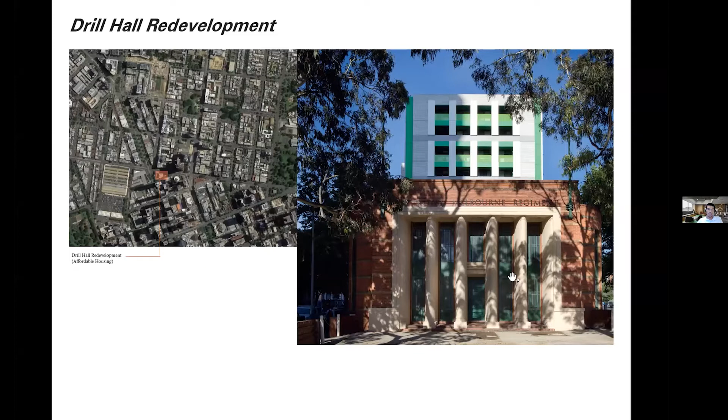This is a shot of the restored heritage hall, which is normally used by the people of Melbourne. Last time there was an event by the Malaysian group here for Hari Raya, which was quite nice.

This is the McIntyre Drive social housing, located in the coastal town of Altona, west of Melbourne. Melbourne is on the east, on the right side here, so this is probably about 15 kilometers from the Melbourne CBD.

For us, this project is quite unique with the size of this development that nestles among the low-scale residential neighborhood. All around here are single-story residences, whereas we are occupying this site, which is quite a massive site compared to all the surrounding development.

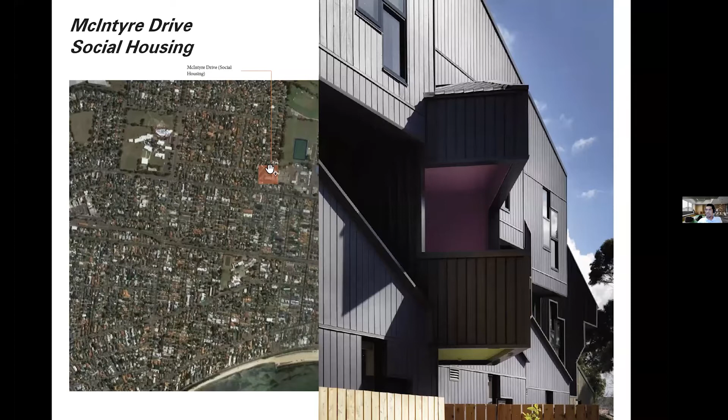We completed this project in 2012, and alhamdulillah, we won the highest category of the national award in the multiple housing category, winning against all other private high-end multi-residential projects. It's also the first in Australian history for social housing to win under this category, so we're proud of that.

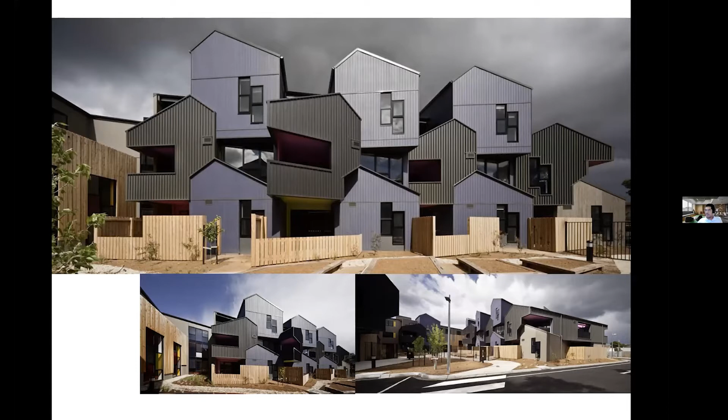Given that the development is quite large compared to the surrounding houses, we cleverly break the facade - each facade, each block, represents each dwelling, each apartment. In fact, some residents, like this guy here when we interviewed him, were proud of their house because people can identify it by just pointing from the courtyard, which is quite good. I think that gives them a sense of belonging to this residential development. We express the vernacular surrounding using a repeated gable motif.

We're quite happy with the outcome of these projects. We're not just adding a new neighborhood in this suburb, but also introducing community activities such as a communal garden, which encourages social interaction between new and existing residents. Given that it's social or affordable housing, we exploited inexpensive materials like fiber cement integrated with the robustness of the metal roof and facade cladding to give a sense of playfulness and articulate the facade facing a central communal space, giving it a strong sense of community.

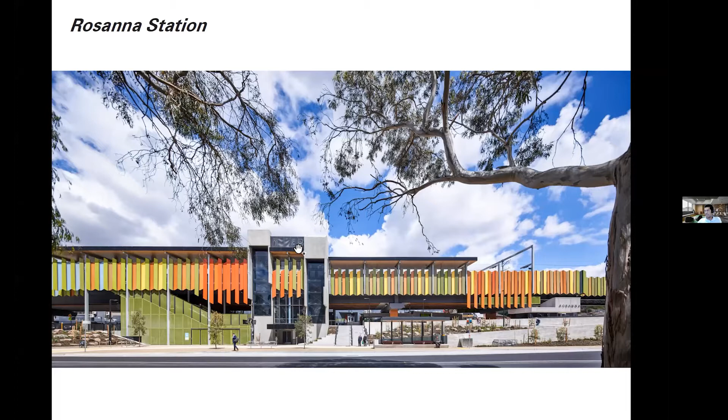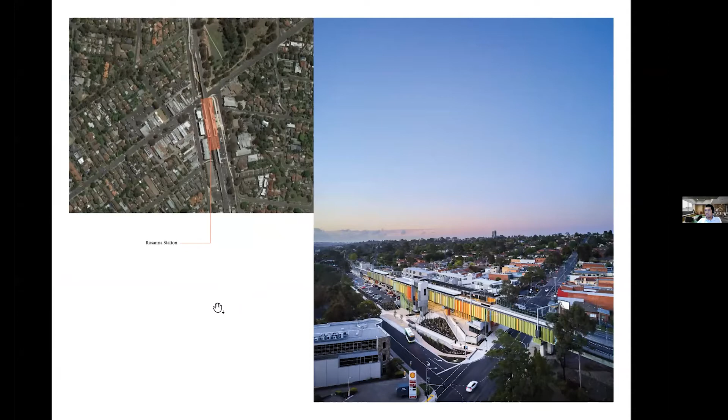The station design incorporates bold color to create a strong sense of identity while sensitively stitching the station into its existing leafy suburb of Rosanna, a small suburb in the north of Melbourne surrounded by single-story housing, quite leafy with lots of green around the site. We came with the idea of introducing bold color that blends with the native flora and fauna around the site.

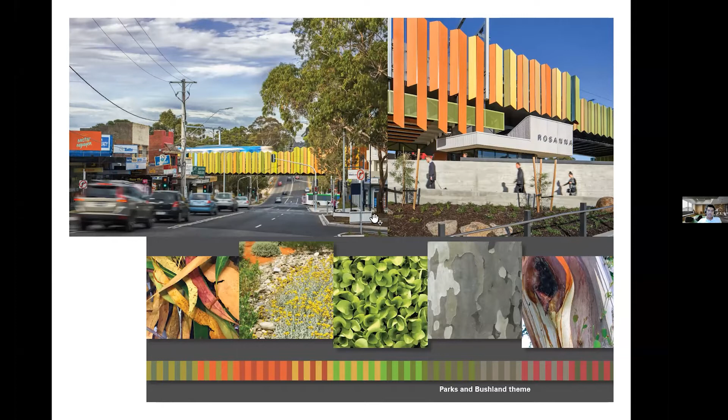The station serves as the main transport hub for the Rosanna community, connecting the metro train from the CBD with local bus networks. The ground plaza under the elevated railway station is utilized as public open space. For this job, we won the Australian Urban Design Awards, I think two years ago, or last year - I lost track with COVID, sorry about that.

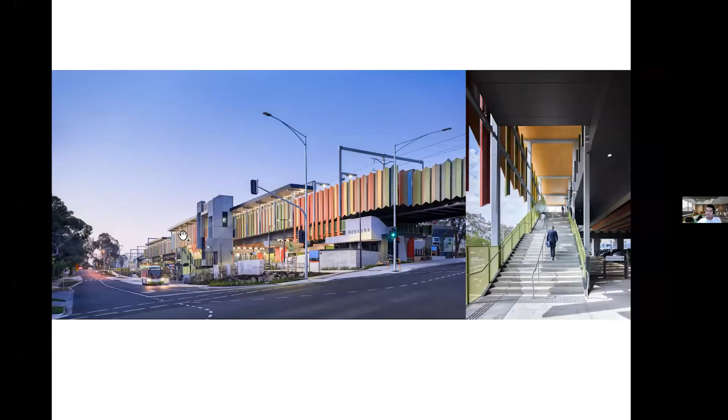Next job is the Swinburne University of Technology College. I think they've got an architecture course at this university, so maybe some of us will be coming here when we study. It's located in the southeast of Melbourne, in the suburb of Hawthorn. We completed this project early last year, just a couple months before Victoria went into its first COVID lockdown.

For this project, we had to provide additional space inside the existing unused courtyard of the college. The new space includes new teaching rooms, a few offices, and a very large lab for the robotic engineering department. Another brief we had to meet was requiring significant daylight into all these new rooms and labs.

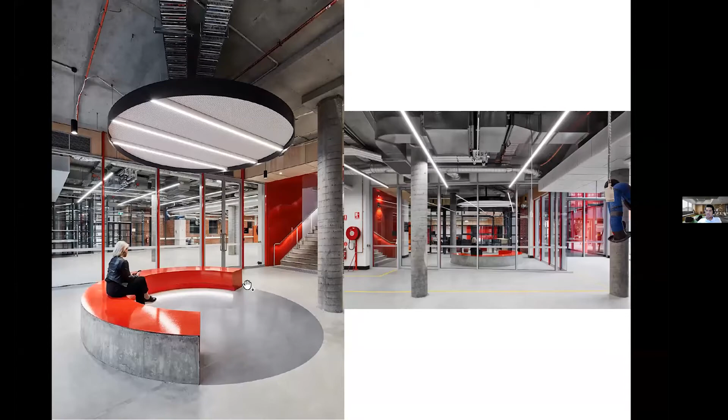With this, we managed to squeeze in 6 classrooms, with 3 classes stacked on top of each other. It's quite a nice project.

This is the Russell Park Independent Living Units that we completed early last year, around the same time as Swinburne Uni, just before the Melbourne lockdown. It's a quite unique project because we had to develop an apartment on a narrow land right next to a train station and railway line, consisting of 35 dwellings. The new buildings also had to respond to the heritage neighborhood of the old 1869 Colonies Cottage, which you can see at the far end corner.

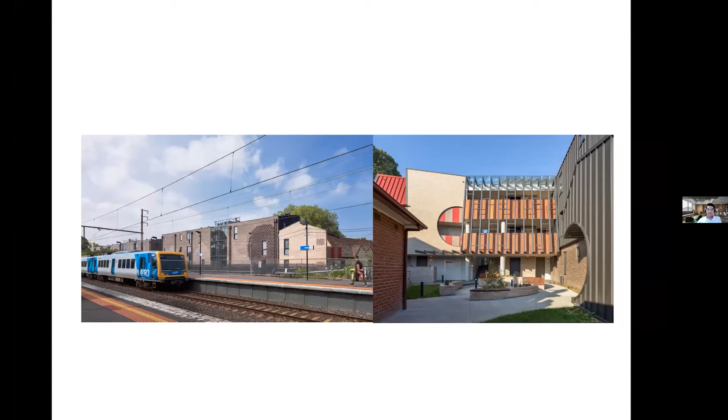These are just more shots of the entry into the apartments. We introduced a brick facade and a few timber elements, like big timber doors, just to give a sense of domesticity and a warm welcome to the residents.

So I guess now we'll discuss the main topic for this evening, which is mainly about the prefab construction scene in Australia, mainly in Melbourne.

As usual, I'll start with the definition of prefab. It's short for prefabrication, and it refers to any part of the buildings that has been fabricated at a place other than its final location, such as a factory, yard, or even a backyard. It's an umbrella term that covers a range of different systems and processes.

So this is just a view of one of the modular factories in Melbourne. I believe this one here is a company called Fleetwood, and on the right side is a company called Modscape.

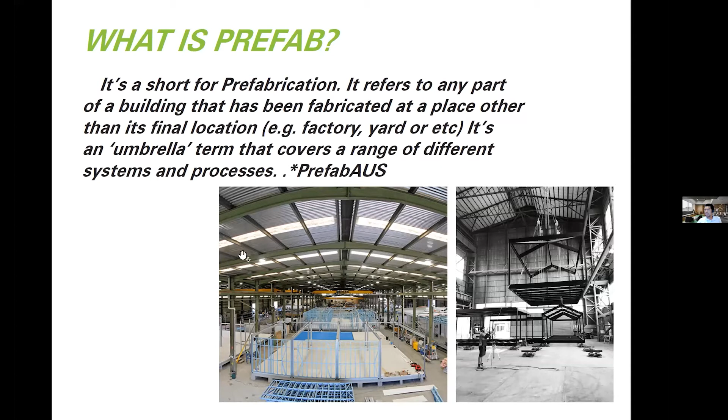So prefab comes in 2 different types. One is known as 2D prefab, and the other is known as 3D prefab. The 2D prefab means a small component, not flat 2D, just a small component. They include precast concrete panels, steel or timber frames, trusses, brick panels.

This one here is like a brick cast on precast concrete. Sometimes it can be a balcony balustrade, a stair, like a steel stair flight in one piece, or a curtain wall panel, or mechanical equipment for a plant room. And 3D prefab is the large component, such as a large timber or steel structure.

For example, like this bridge here. This is actually a bridge for Rosanna station that we did. The most common product for 3D prefab is the actual modular building, like this one here. This is one of the jobs by one of the modular companies in Melbourne called Prebuilt.

So it consists of a combination of all 2D elements into one, including ceilings, floor finishes, built-in joinery, and fixtures. So essentially, it's actually ready to be used.

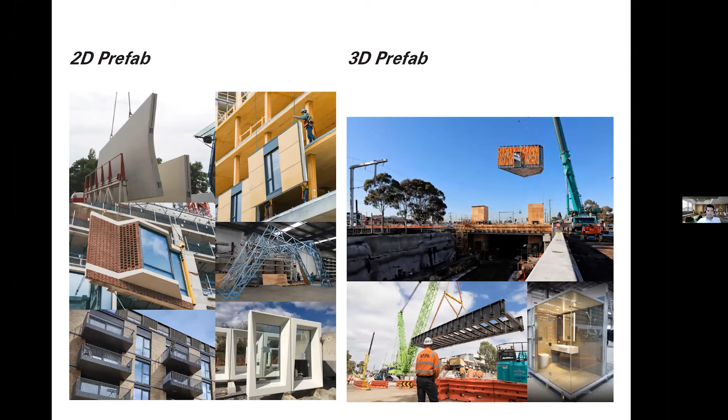So prefab is actually not new. It's been around for a long time. This is the image of the Roman fort built by the Romans around AD 43. They used prefab timber to build this quickly in Britain.

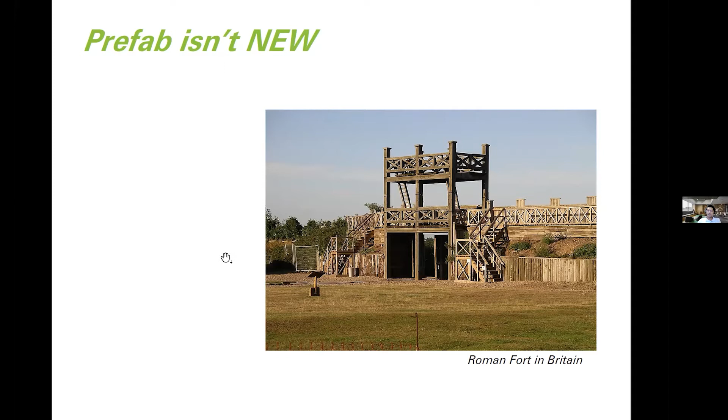In fact, I think we as a nation also have our own prefab that can be found in our traditional Malay house. So I think we should be proud of that.

This photo here shows the first modular home in Australia, shipped from the UK around 1850s. The majority of this prefabricated home was shipped to Victoria during the gold rush era. They consisted of a metal cladded wall on timber frames and a metal roof.

And they came to Australia as a flat pack on a ship, like IKEA, no? Came from a ship from UK to Melbourne via Singapore.

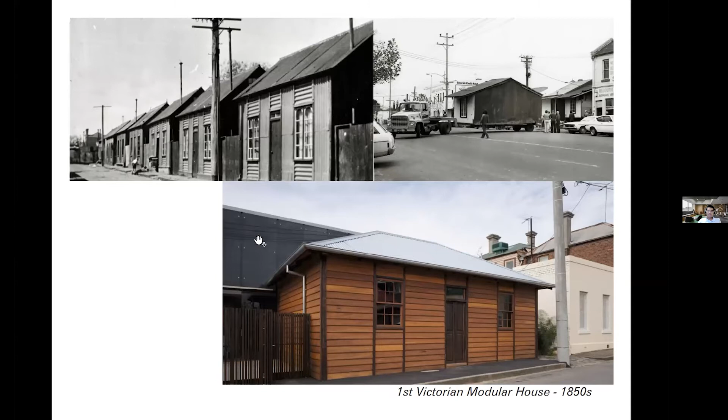So why prefab? Obviously, some of us probably already know about this. With prefab, we can create very high quality buildings because it's all made in a controlled environment in a factory. Plus it increases efficiency, precision, productivity, especially nowadays where we can use current software such as Revit and 3D printing technology with a robot arm and others. So that will increase efficiency and precision.

Plus it's actually 20 to 50% faster compared to normal construction due to its manufacturing and fabrication being completed parallel with the site preparation activities. This will also minimize the risk of unfavorable on-site weather conditions.

As mentioned above, we can also prevent unnecessary delays and expenses resulted from unexpected weather. So it doesn't matter whether it's raining or not, they can still build in the factory. They'll probably be held up on site, but the factory just keeps manufacturing the building, whether it's rain or storm. It's also sustainable construction where they can reduce construction waste and recycle all the leftover materials.

And with prefab, we embrace new technologies. Like I mentioned before, we construct using robotic arms or use new materials. Plus, we can also run a test of the product or system before we complete the installation and assembly on site, such as a water tightness test or thermal leakage test in the factory before we assemble everything on site.

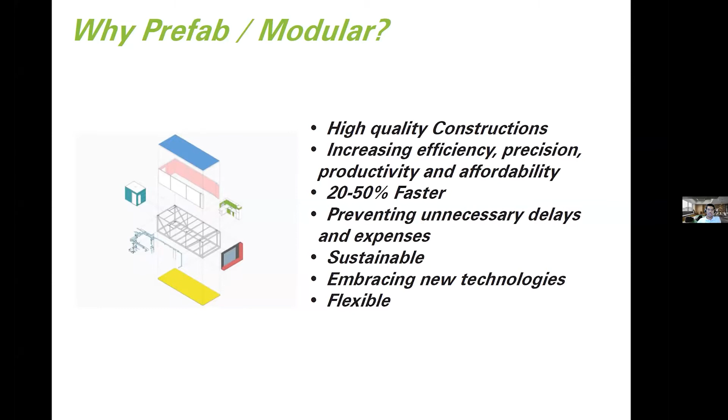Prefab also promotes flexibility, which allows the built forms to respond to the needs of today. For example, a hospital can expand their treatment rooms for COVID patients. Prefab also allows for reuse and restructuring of modular components, with the ability for future expansions to meet user requirements.

When we talk about modular building, normally people think the building will be square, and always look like a shipping container. Obviously that's boring - I think architects will think this is crap, just a box - but that's actually wrong.

Modular buildings obviously need to be built within a certain size. Here in Australia, the maximum module that can be transported is 18 meters length by roughly 4 meters high by 5.5 meters width - that's the size of the largest truck. It also depends on the size of the road leading to the site. So if we're doing a project in a rural area with only a small, tiny road, we probably have to break up the module into smaller pieces for easy transport.

So as mentioned, designing in modular will obviously be constrained by limited size, but the design of a module doesn't have to be a boring box like those shipping containers.

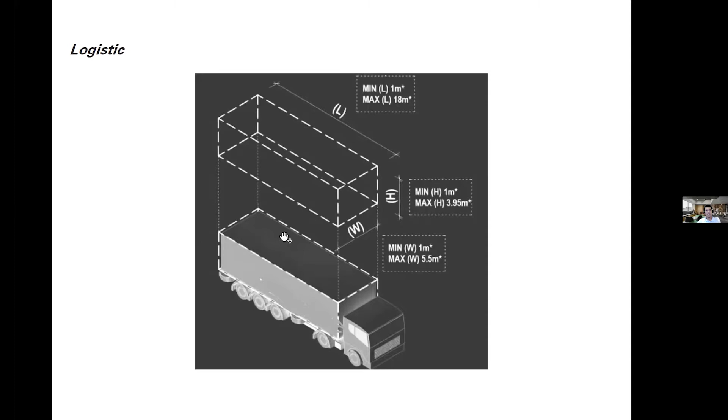It can come in a boring shape like a rectangle, or be split into square, or have a bevel edge, angle, facade, trapezoid, steps, round edge, curve, bend. From all these 9 shapes, you can combine them and make an interesting building.

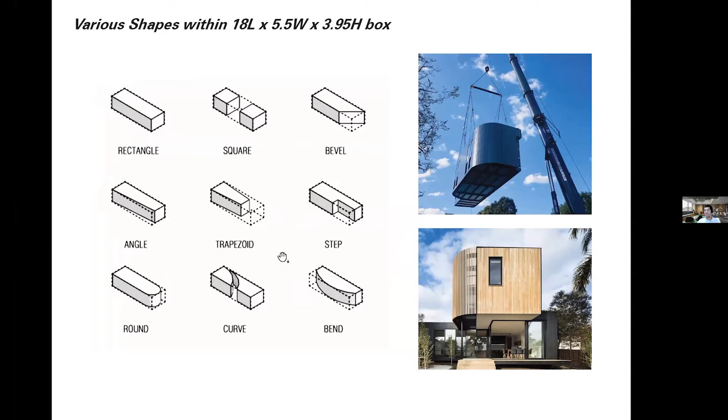So how does the modular breakout work? These are a few examples of projects by two well-known modular builders in Melbourne, ARKit and Modscape. On the left is how they break up the building into about a 5-module system.

It's a 2-story semi-detached townhouse made from a 5-modular system. The blue is the longest module, and they also have the green, which is the staircase. The staircase connecting 2 levels is built as one piece, in one frame. They model everything in Revit, then send it to the printer to cut all the structural members and assemble it in the factory.

On the right side is a project by Modscape - it's actually a school. They break the plan into about 8 modules, and it doesn't have to be a box. You can introduce curved walls to the external facade and internal passage to create an interesting facade and layout for the building.

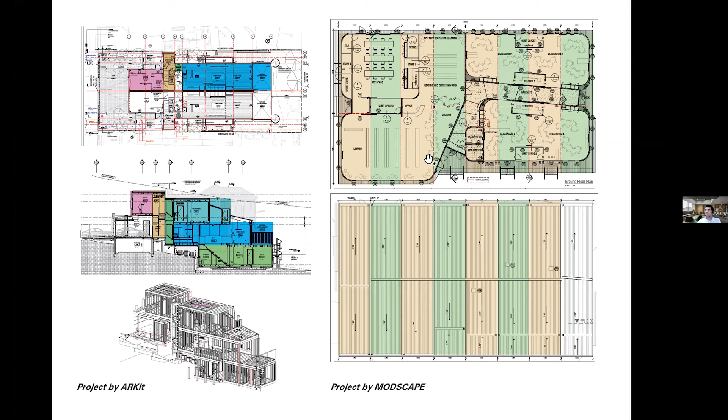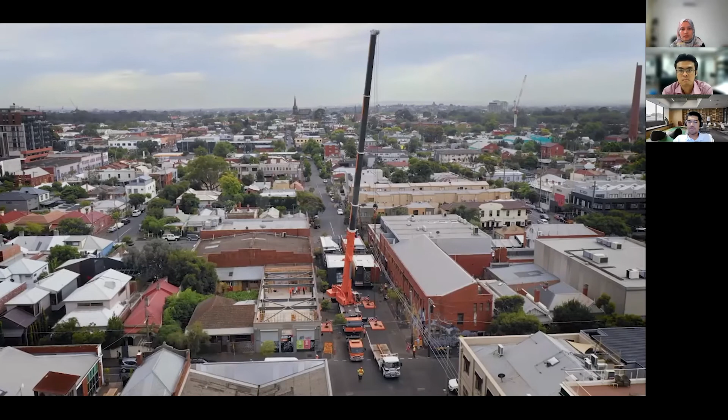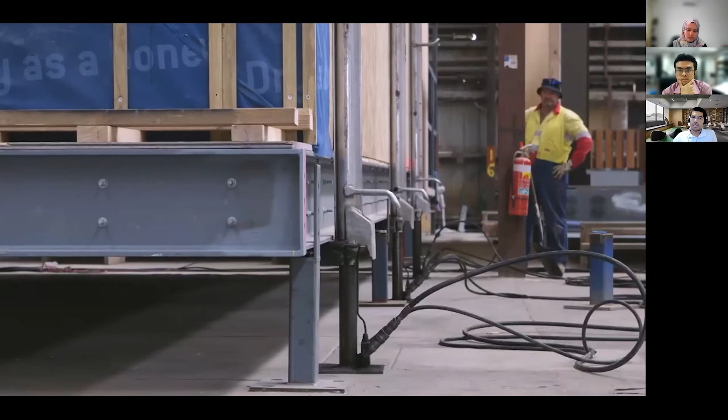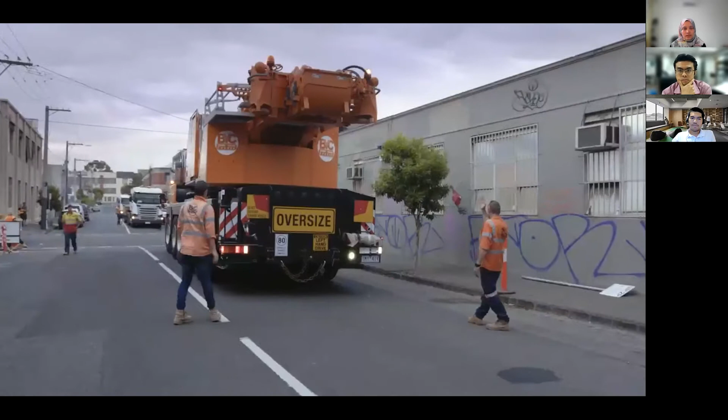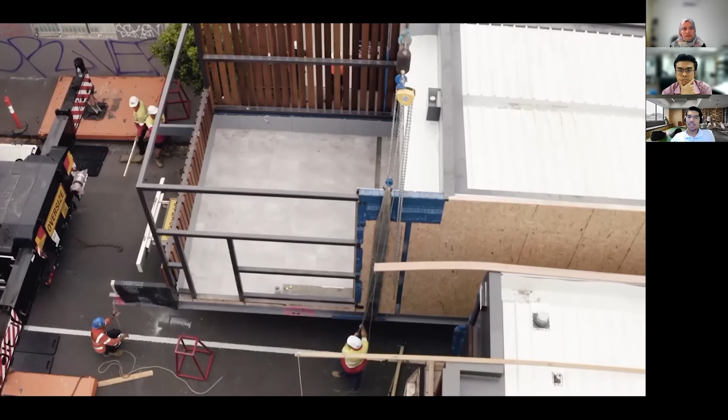So this is one of ARKit's projects, an apartment in Melbourne. They build everything in the factory, and you can see the size of the truck there. They have to transport those modules either at midnight or very early in the morning before peak hours, because it will affect the traffic.

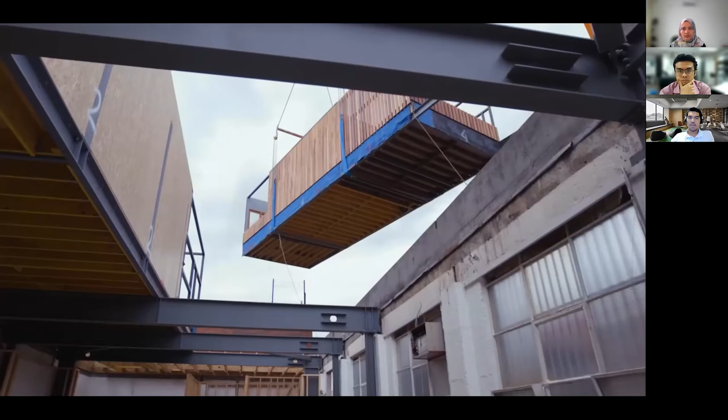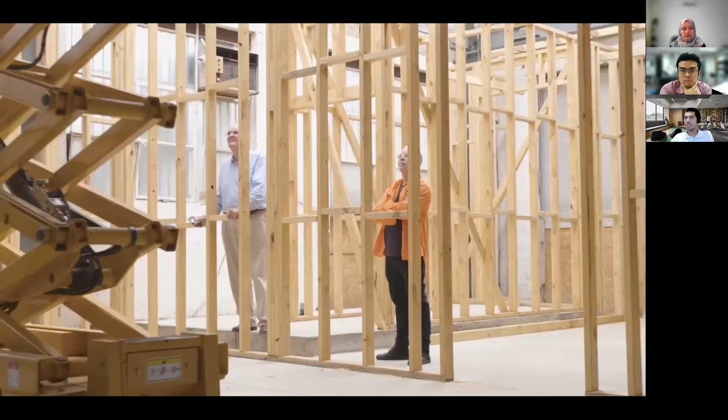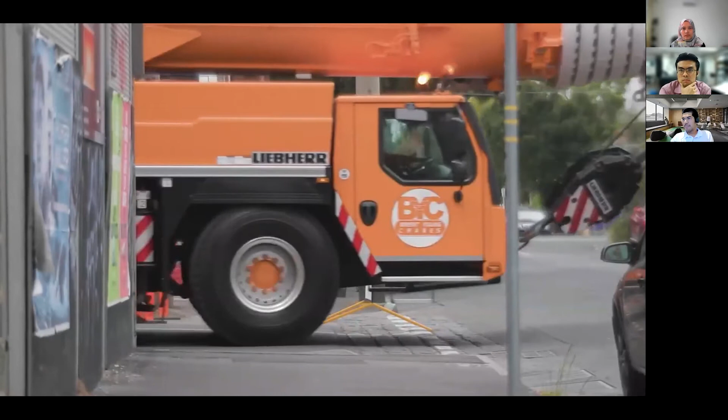These apartments stack on top of an existing building to create additional space for the new residents. This project consists of 4 modules. A project like this normally takes up to 2 months maximum, from the start of manufacturing in the factory to full assembly on site. So that's actually very fast. And there you go, people celebrate.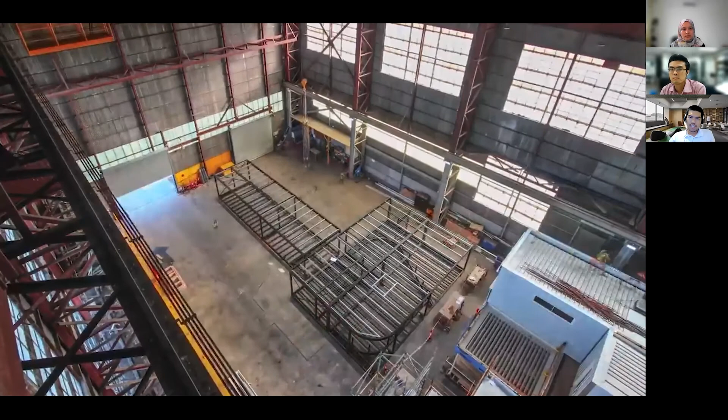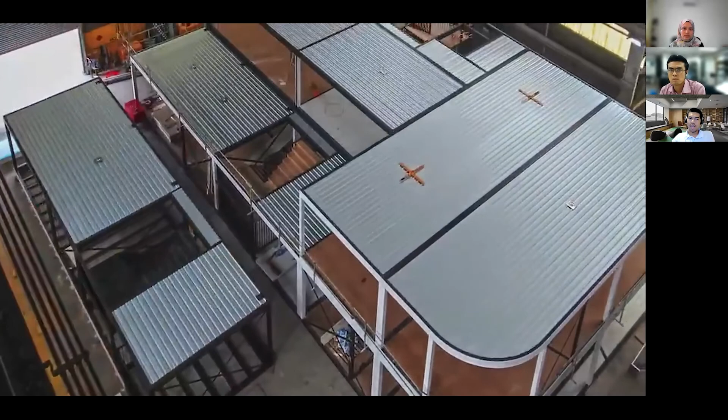The second video showcases a project by Modscape, a vertical school in Sydney, the one I showed in the previous slide. They've constructed the 4-story school in the factory themselves, consisting of 20 modules as a whole, including the internal finishes, joinery, and everything in there.

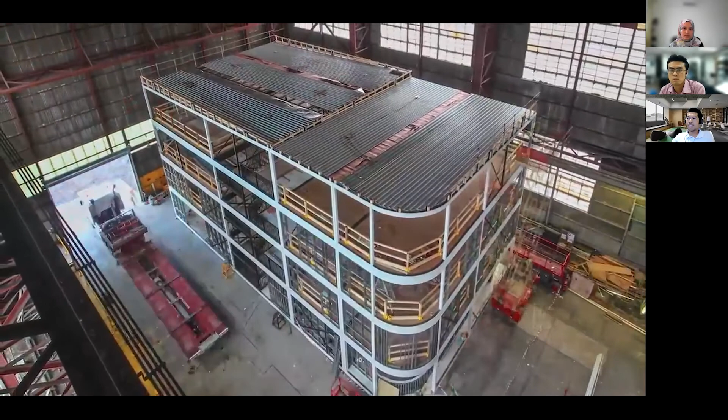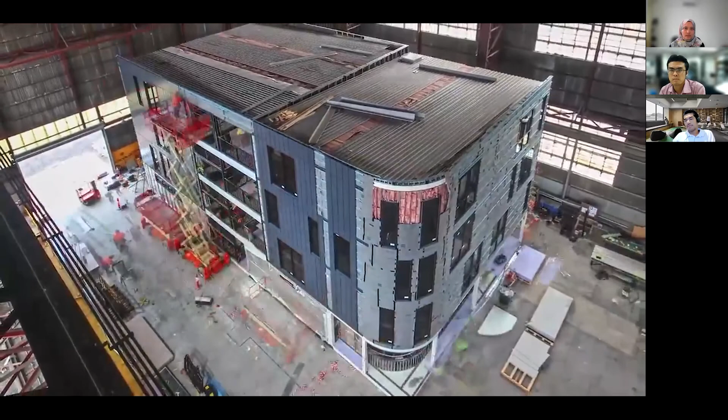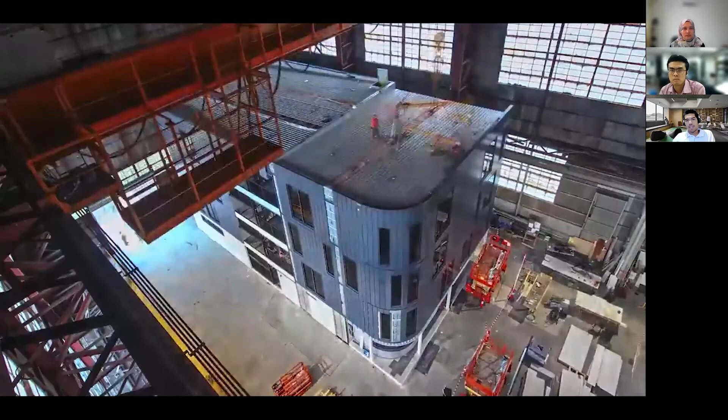The advantage of modular construction in the factory is that we can run a pre-defects inspection for most of the interior works off site. Once completed, they just transport each module to site for final assembly and a final defect inspection as a permanent structure before handover to the client.

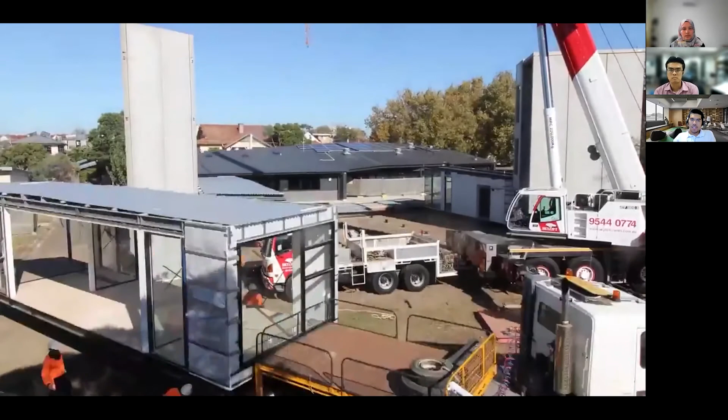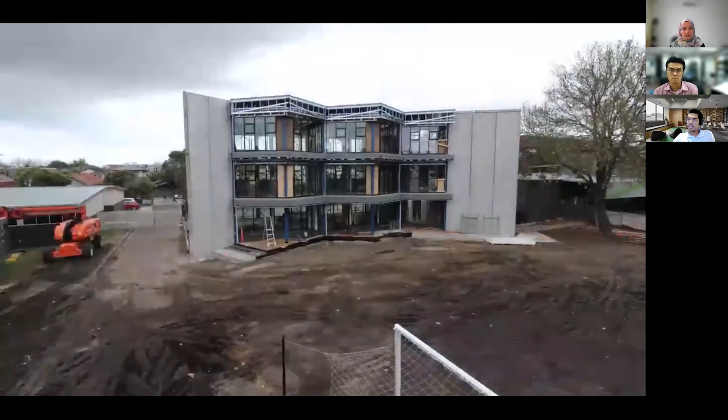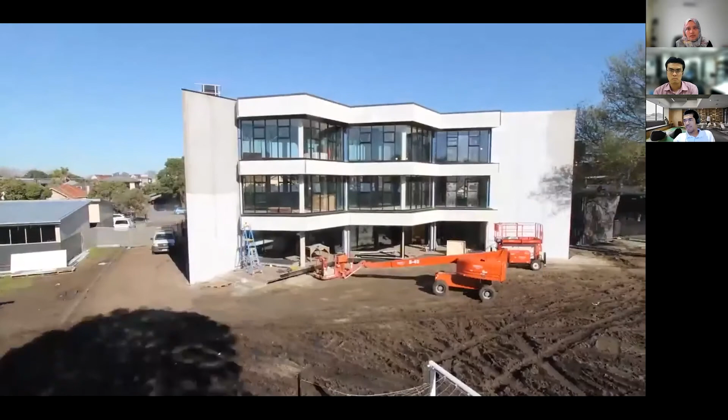This third video is by Fleetwood, constructing a 3-story school. The building consists of 30 modules plus a precast concrete stair and lift core anchoring both ends of the building. From the start of this video till the end, this actually only took 2 days on site, and then probably the opening ceremony a couple of days later.

All right, so I hope everyone's learned something from those 3 videos. So now we're back to MGS projects.

We did attempt to adapt prefabrication and modularization in some of our projects. For example, the Swinburne University of Technology building TC, because we could see the opportunity to do that in this job, given that it's just a couple of classes inside the existing courtyard.

First we proposed to break the building form into multiple prefab elements, such as the teaching rooms. The classes consist of 6 classes, and we thought the stairs could be prefab too, and the floor could be made from a split floor panel. The steel frame could be built offsite as a 2D prefab with glazing, and the front facade could also be built offsite as a panel, plus this entry canopy as a separate element.

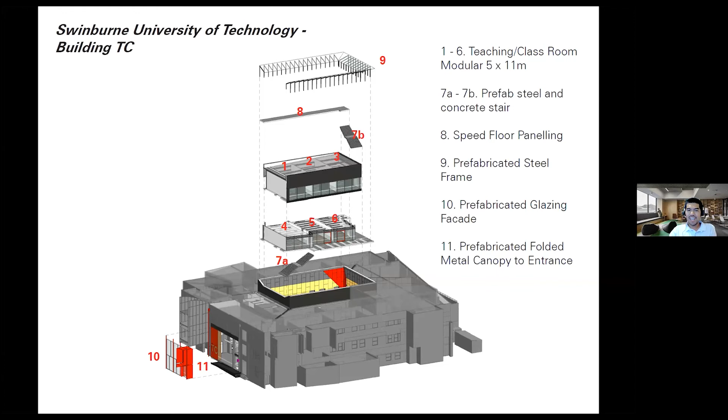Again, unfortunately, our attempt didn't work, and we didn't get a chance to explore this project further in prefab modular, because the project was tendered as an open tender and won by a conventional contractor based on cost.

So modular, just to let everyone know, doesn't mean cheap. It's not really cheaper than conventional construction. It can sometimes be quite costly, but what we can guarantee is that you can definitely achieve a high quality product compared to on-site construction.

When comparing cost between modular and traditional construction, we have to factor in all other costs, such as delays due to weather - that's cost, equals time, equals money. We also compare total construction time between building from scratch on site versus the simultaneous construction that runs parallel between factory and site preparation. That's the advantage of modular.

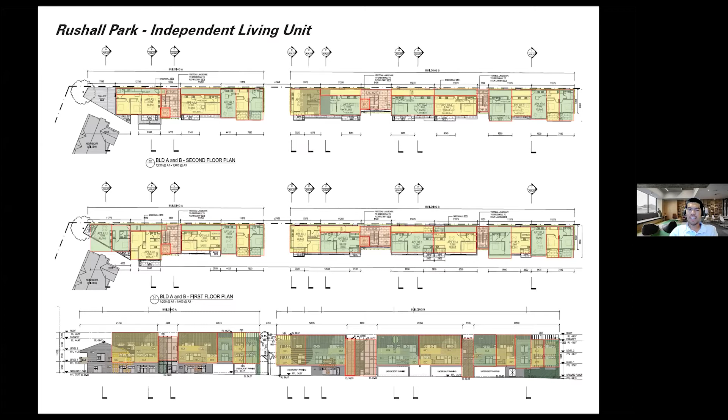But obviously, if we're not following a program, and we do a major design change quite late in the project, that will affect the program. It doesn't matter if it's a conventional or modular project, but it's definitely worse for a modular project.

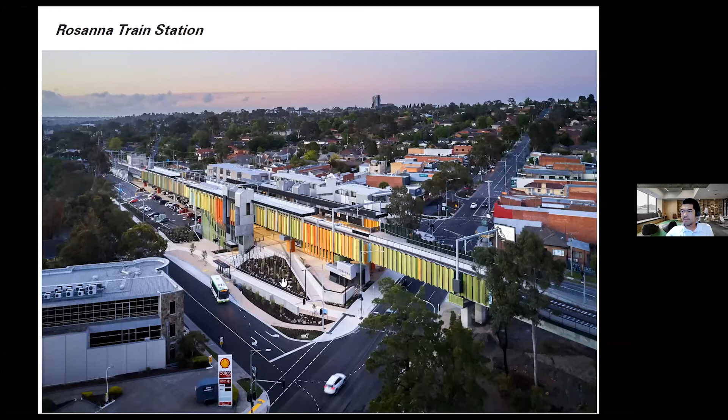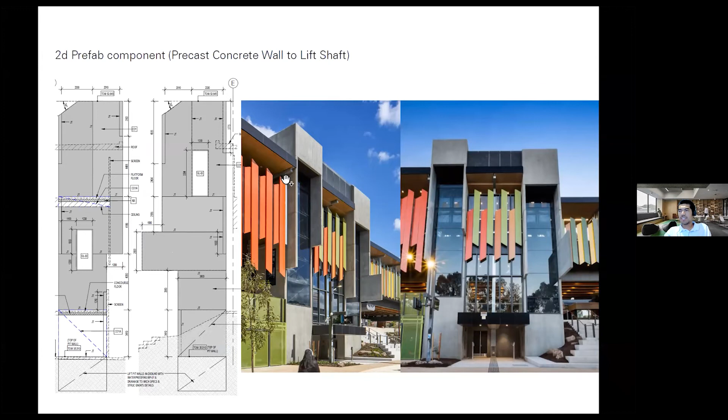These are all considered 2D prefab components, built offsite and drawn in Revit so we can achieve accurate sizes. We coordinate this with the contractors so they can build offsite and transport to site, then just assemble it. I think it took maybe 2 days just to erect this concrete, which is quite fast compared to block work.

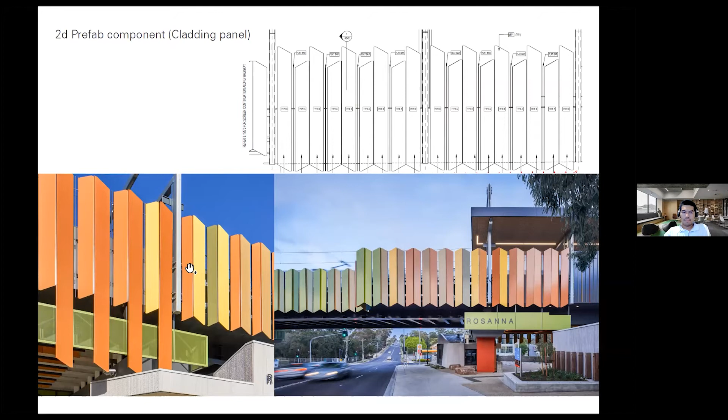By using GRC, it takes out the weight of actual concrete, so it can easily transport to site. It looks heavy from this photo, but it's actually very light.

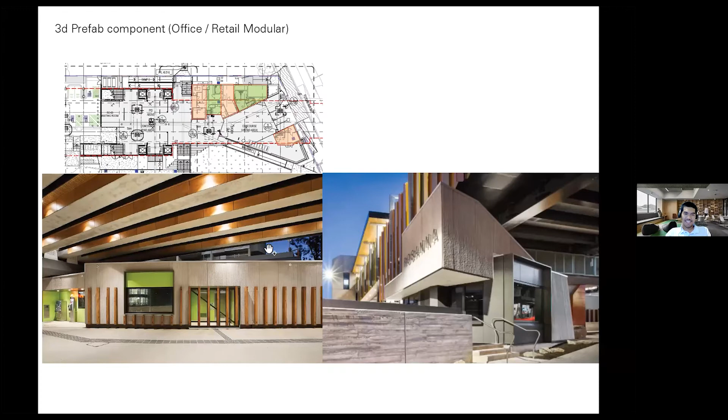For example, with a school, there's a clear advantage to using modular, given that it's always the same module size for the class. We're dealing with an intake every year, so you want the projects to run simultaneously with the site works. By the time kids have their school holidays, we can use that 2-week period to set up the building on site and be ready for the next term.

Another factor is climate issues, variation of the module, and availability of trades - these should be factored in when considering modular construction. We have to think about the availability of trades, because sometimes you can't do everything if there's not enough resources. That's one of the factors we have to consider.

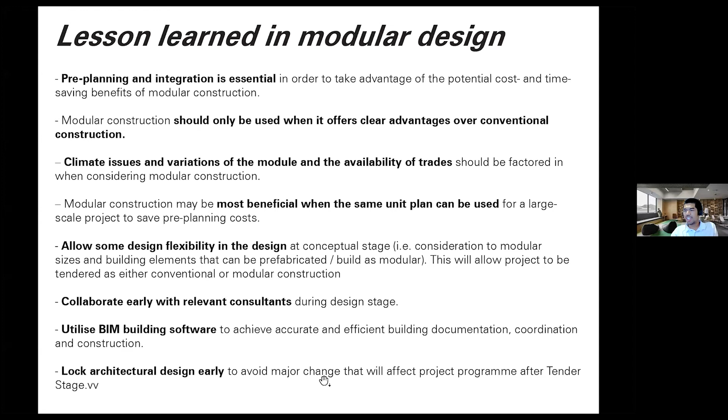Another point is you have to collaborate early with all the relevant consultants, including the builders if possible, which would be a bonus. With current technology, we should utilize BIM software such as Revit, so we can achieve accurate and efficient building documentation, coordination, and construction. Lastly, always lock the design early to avoid major changes, since no one wants to change the design at the last minute. I think that's about it. Thank you very much, everyone.

Thank you, Adi, for sharing your knowledge and experience about prefab and modular construction in Australia. It's really interesting to see the wide range of projects attempted by MGS and prefab companies like Arcade and others doing modular construction.

My first question is: is prefab somehow regulatory required, or is it still optional in Australia, in Victoria at least?

I think I did mention that in the slide before. It's not mandatory, but some state governments are starting to make modular their preferred construction method, especially for building schools, given that it's fast and quick, and they can also do defect inspection both in the factory and on site, so they don't waste time. You can do the defects in the factory, so you don't have to wait for good weather—you just go to the factory and inspect everything, then do the final inspection when they finish on site. So to that question, it's not mandatory; it depends on the project, the client, and the budget.